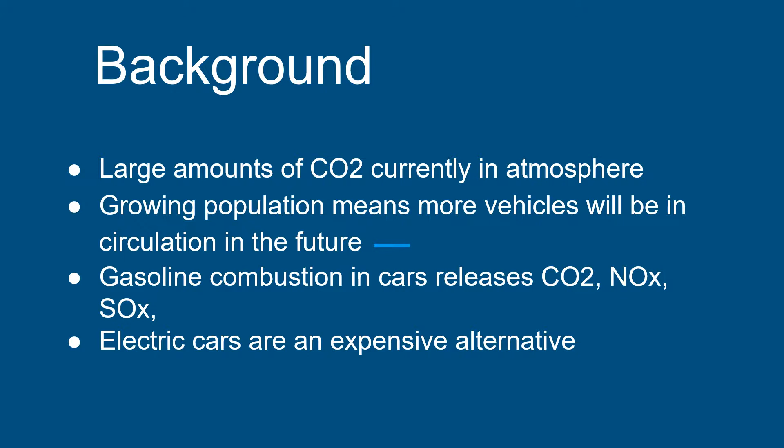One of the most popular options currently present is E85, a mixture consisting of 15% gasoline and 85% ethanol. Ethanol combustion is much cleaner than gasoline combustion, meaning it is much better environmentally than the common gasoline-only fuel. Ethanol is produced from a fermentation and distillation process using corn or sugarcane as a basis, after which it is mixed appropriately with gasoline. However, E85 does not come without its own problems which need to be resolved.

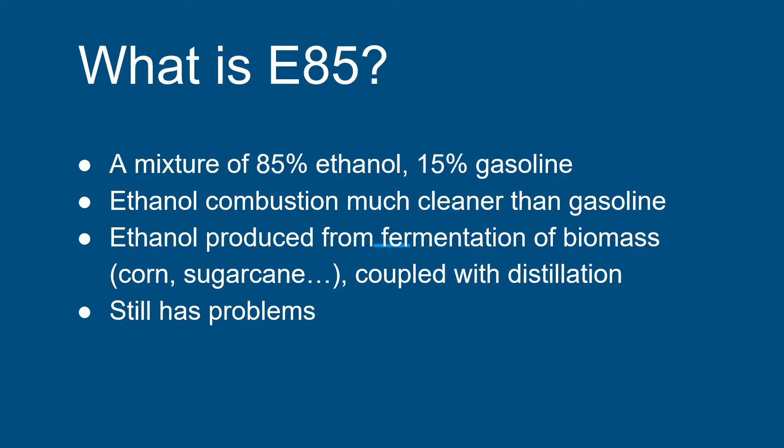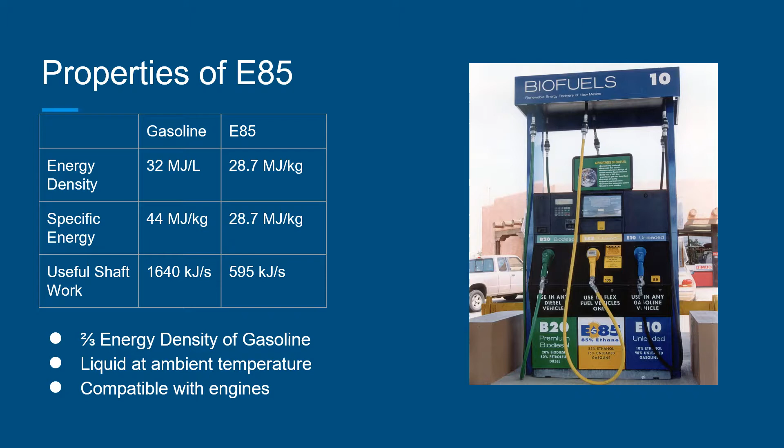A few specific properties allow E85 to be used as an alternative to gasoline. As shown, the energy density and specific energy values are similar, roughly about 2/3 those of gasoline. Additionally, ethanol and E85 are liquids like gasoline at ambient temperature and fairly compatible with engines. Running the calculation through to determine useful shaft work with the assumption of a 30% engine efficiency, we see that about 600 kilojoules per second of useful work are achieved using E85. However, there is still room for improvement.

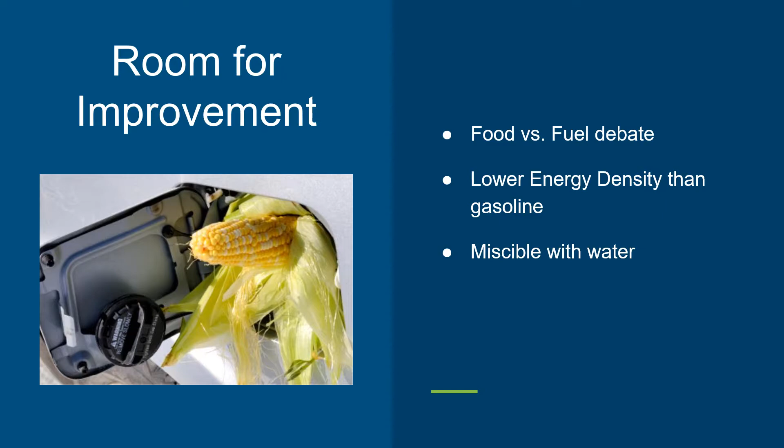One area includes the food versus fuel debate, which basically centers around the controversy of using arable land for growing food or fuel. Since most ethanol in the United States comes from corn and soybeans, some people believe those crops should go to feeding the population. Additionally, as mentioned, E85 has a lower energy density than gasoline and is miscible with water, which can result in engine damage. Before beginning our analysis, we created this set of assumptions.

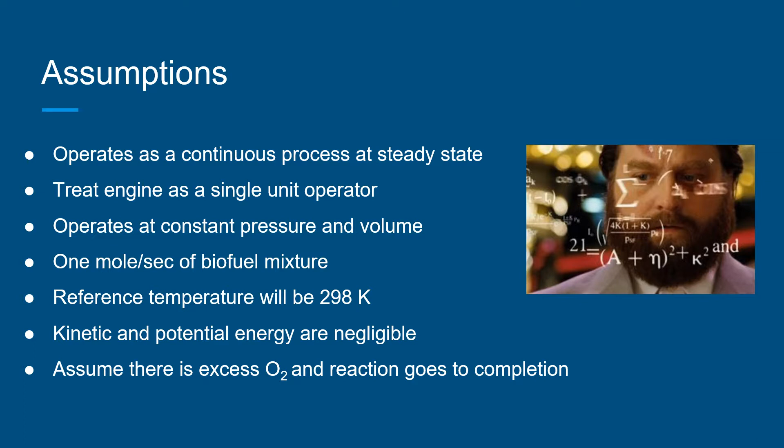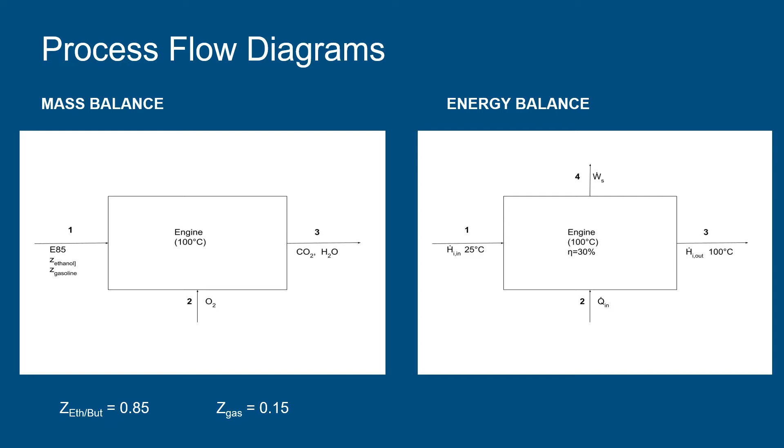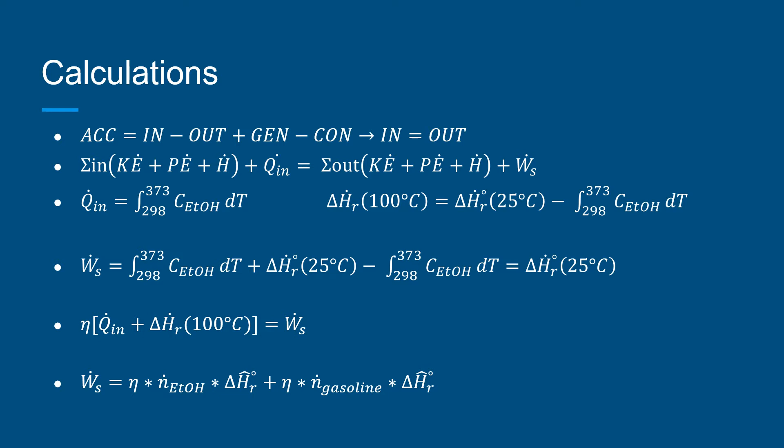Because the process is continuous and energy is neither created nor destroyed, the balance equation simplifies to in equals out. The negligible kinetic and potential energies mean that the energy balance is the heat added into the reaction plus the enthalpy of reaction at 100 degrees Celsius, resulting in the amount of shaft work the engine can perform. After simplification, the shaft work is equal to the enthalpy of reaction of E85 combustion, which is the enthalpy of combustion of ethanol and gasoline, multiplied by their respective mole fractions. From these calculations, it is evident that BU85 produces more energy than E85 per liter, per gram, and per second combusted within an engine.

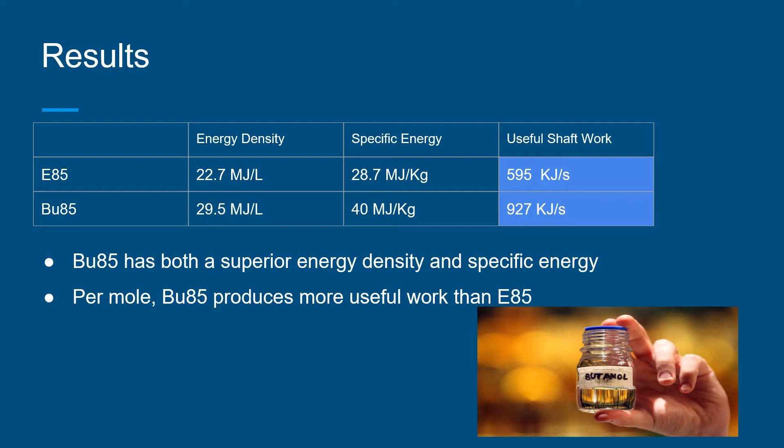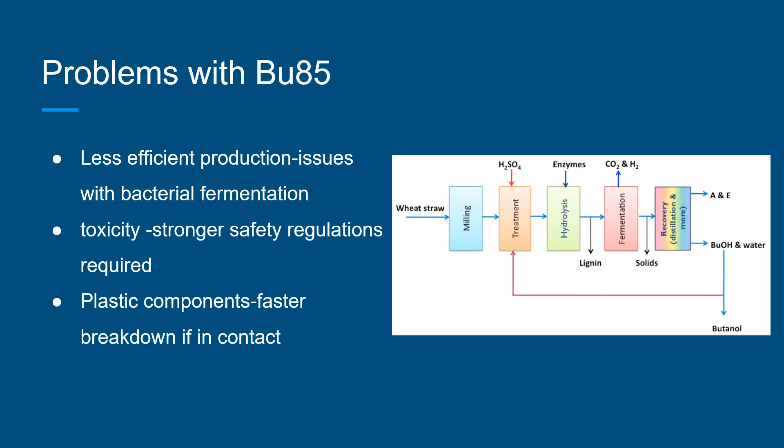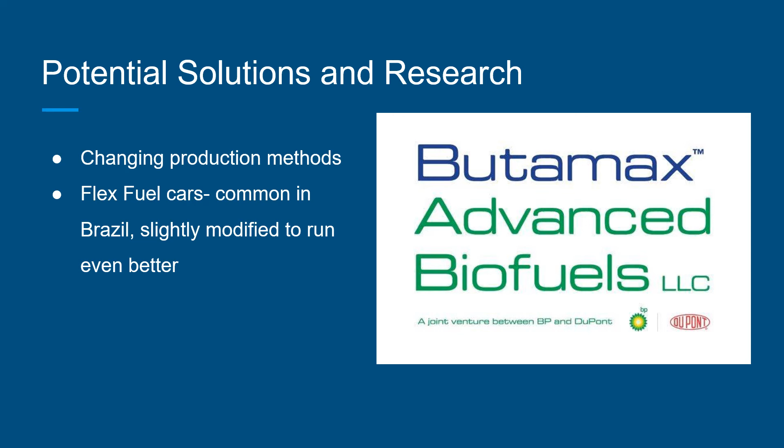Bu85 is still not perfect and has some issues that are currently being researched. For example, the bacterial fermentation process used to create it has quite a low efficiency currently. It is also slightly more toxic and can cause damage to plastic components of cars. However, Bu85 and other butanol-based fuels are being heavily researched in attempts to solve these issues. Additionally, like in Brazil, flex fuel vehicles are becoming more popular, allowing Bu85 to be used without fear of car damage.

We hear about it in the news every week. Climate change is getting worse. We desperately need solutions to reduce greenhouse gas emissions. While E85 offers one, with more research and its superior properties, Bu85 has the potential to address these issues.